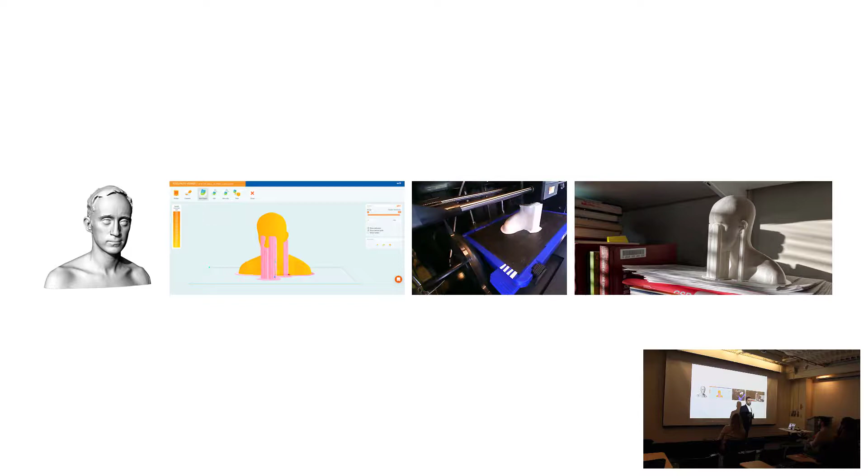This transmission between platforms prevents experimentation, prevents iteration, prevents fluidity in this creative process, right? And if something goes wrong, you have to go all the way to the beginning and start over again, right? This process is very unidirectional, and it doesn't allow for a back and forth between the creator and its tools, which comes from a very long tradition of craftsmanship, where the wholeness of the creator, the tool, and the material is an integral part of this creative process.

And many authors have argued that that craftsmanship is a little lost. And it's lost because of the bias of how these machines force us to use them and to make things with them, all right? So there's all this new wave of interactive fabrication where there is a claim about whether we can close back the loop and make these machines accept back and forth, right? And a lot of work has gone in that direction as well.

The problem with this is that the tools that enabled this were very specific, very customized to these particular projects, and were created by people with very high skills. In order to do this, you have to hack a lot of things, and only people who really know what they're doing can do that. It's not accessible, it's not open to wider audiences, all right?

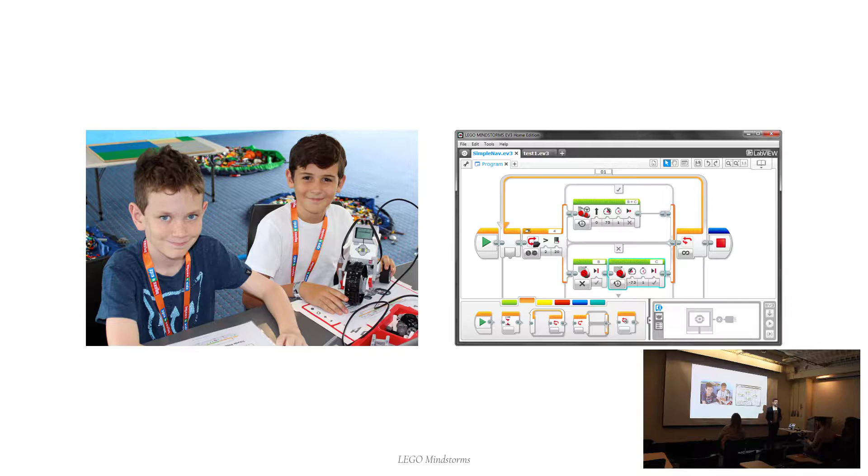I don't know if it's children. I don't know, but I think there has to be an alternative way to approaching robots that doesn't come from symbolic training, but comes from somewhere else, from interactivity, from practice, from action. We're going to get to that very soon, all right? And why do I think that? Because I think that if robots are moving from highly industrialized environments to research labs, to creative audiences, there have to be different tools that address each one of these particular fields, all right? That's my take here.

No questions, okay. So, yeah, thank you.

So this is what I see as the problem space, okay? And my contribution to this problem space comes from a long and wide wealth of studies in cognitive science throughout the 20th century, all right? This situation that I'm describing was very similar in the 70s with computers. People didn't know how to use them. It was very tedious. It was only accessible to a very, very elite. But now they're everywhere, right? And I think that that process is happening with robots as well.

There were a lot of people in the 70s and the 20th century who studied the cognitive aspect of how we learn about using and interacting with machines, all right? And my three main pillars in this dissertation have been Jean Piaget, who founded the theory of constructivism, a theory that says that we learn things by creating models about what we want to learn and then comparing those models with reality, all right?

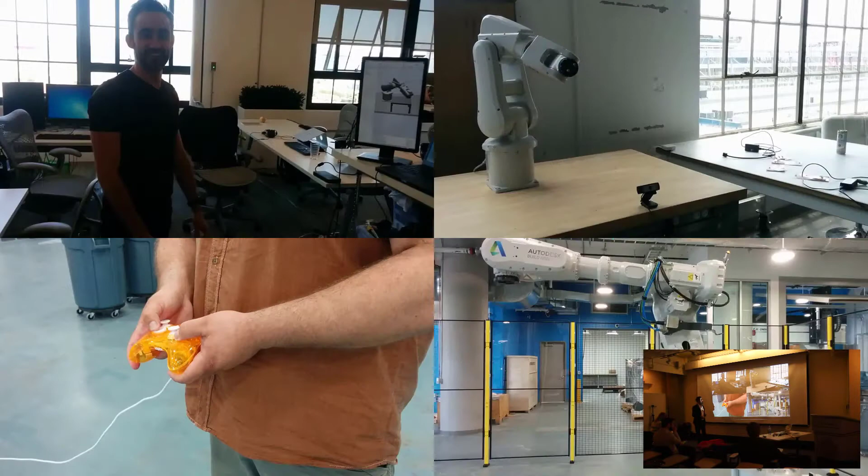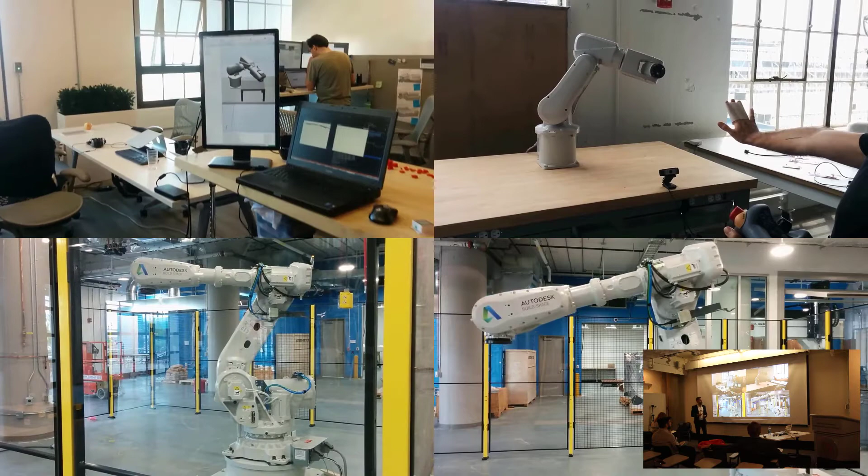So early tests of this framework proved successful. You could do interactive real-time control of machines, and it was actually a lot of fun. But these early tests also proved that C# programming is a very niche thing. It's only accessible to a very tiny group of super users, and building Windows apps is not something that everybody can do. So there was a need to make this available to a wider audience, this creative audience that I'm trying to address in this dissertation.

So obviously, what those people usually use is visual programming languages. So very immediately, we ported all this logic to Grasshopper as a Grasshopper plugin, and we also ported it as a Dynamo package. So you can access the exact same functionality, but from a visual programming environment.

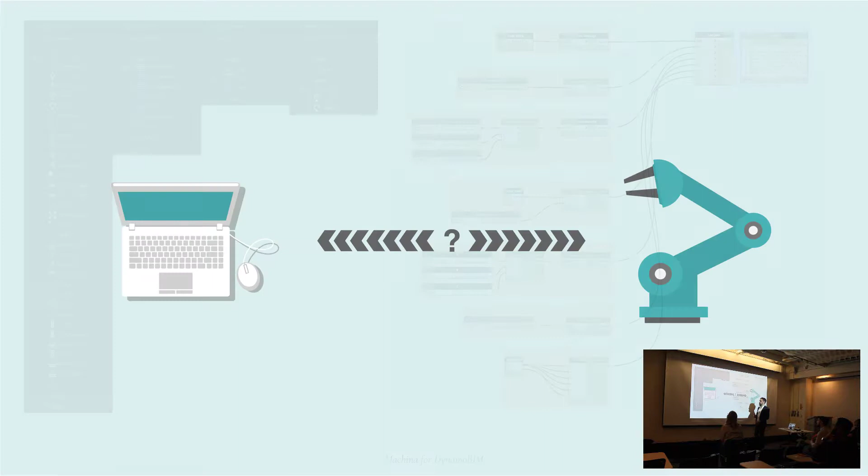The problem with this was very simple. Visual programming languages start somewhere, they produce data, and they stop. The real-time aspect is really hard to implement natively in Grasshopper or Dynamo, because of the way they work. So we can impose actions, but getting data back is really hard. And if we stop there, then we would be perpetuating this model that I want to break free from.

So while this was happening, my friend Nono and I were preparing for this workshop with robots and machine learning, but we really didn't know who was going to participate. We didn't know their skills, which languages they use, or what tools to provide for them. So what should we do? Should we rewrite Machina for Python and JavaScript and all these languages? That would be super tedious and take forever. We didn't really know how to address the uncertainty of a group of users we didn't know, which is actually a very legit question for doctoral research as well.

So we had a sort of aha moment. What if we could isolate in a self-contained environment all the part that was technically complex to implement: the state representation, the back and forth, low-level communication with the machine? What if we pack that in one single environment, and then provide access from any programming language, any platform, any environment, to any decision-making agent? And we make the back and forth communication very simple with a standard protocol, which we chose to be WebSocket. WebSocket is super easy to implement and available in most programming languages. So that led to what I'm calling the Machina bridge.

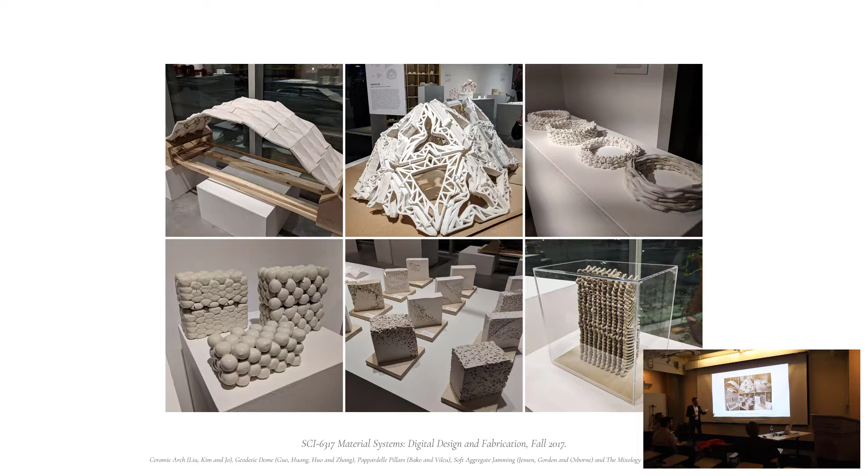And a lot of this work started with a class that my advisor, Professor Bechthold, and I started in the fall of 2017. It was a digital fabrication class in which many students ended up using robots and ceramics for projects that try to engage and innovate in how we understand digital fabrication and clay. But at that time, the framework was still not very developed, so many of these students had to resort to the classic offline paradigm, all right?

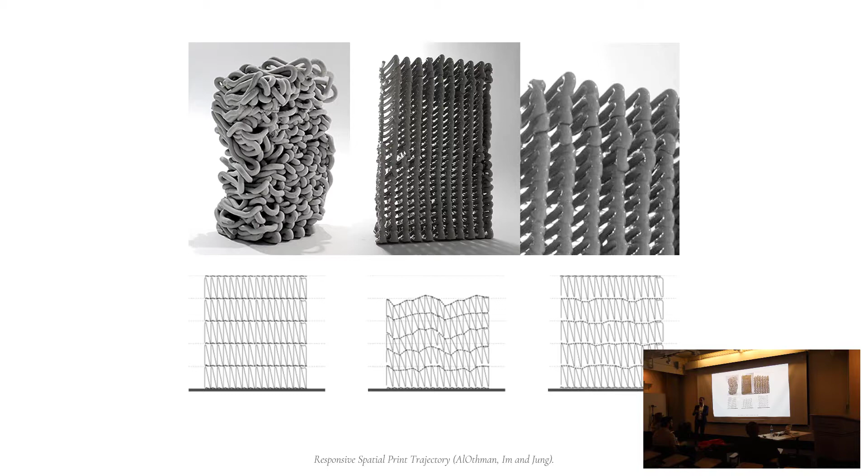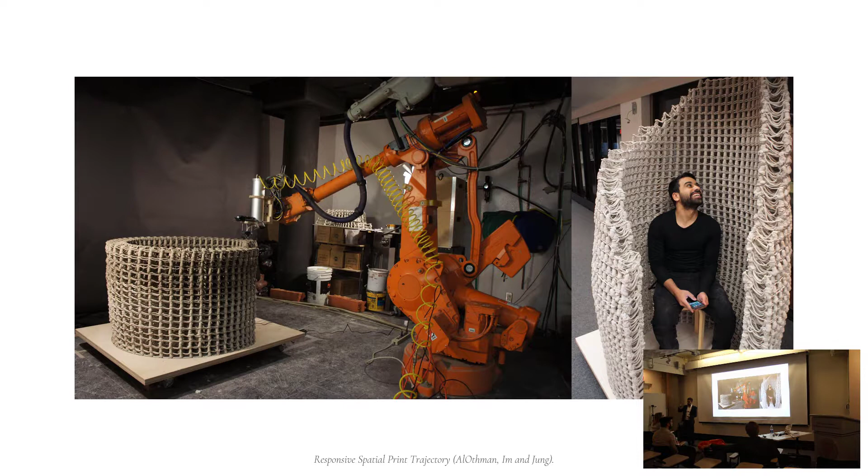With one exception. There was a group of students, Sulaiman, Francisco, and Hyunji, who created this 3D printing lattice system that relied on a self-calibration cycle to recalibrate for the deflection and the changes that happen in fresh clay as you deposit it. So they were able to push this project further and implement a closed feedback loop system where they could 3D print a layer, measure that layer with a 3D scanner, and then incorporate the deflection of those layers back into the system. And then they ended up creating this last Christmas this massive 3D print. It's like this big, it's on the 3rd floor. You should really check it out, it's really cool.

We're gonna put some pots on it, right, Janissa? You're on it, right?

But that was possible because the whole system allowed them to get information back from the robot, which was fed back into the Arduino board, and which was taken by the algorithm that was driving the whole 3D printing process, all right?

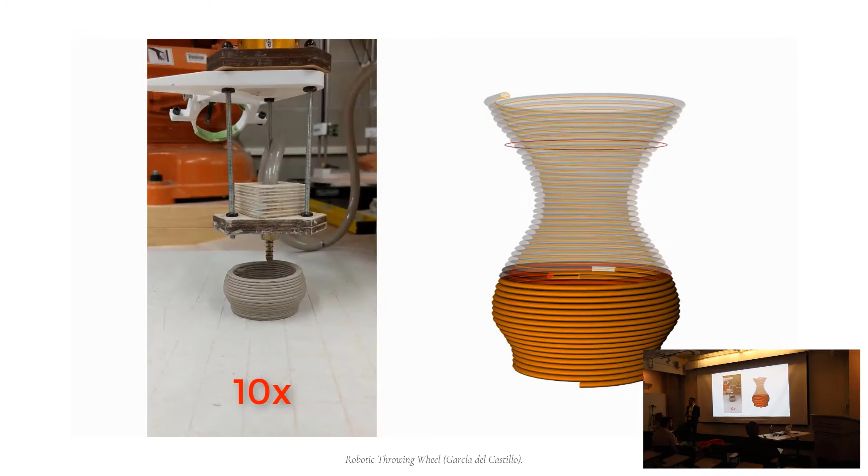Similarly, what if we could 3D print in real time? What if while the 3D print was going on, we had a digital interface that allowed us to change the shape of that 3D print, but also, because the system knows what's going on with the 3D print, it will constrain the freedom that we have so that we didn't create things that fell off or broke, et cetera, right?

So this was a prototype that I created last year, where I have an interface where I can model while the thing is printing. I get feedback from the digital interface. I get feedback from the physical print. And I was able to create this real-time modeling environment, like a modern version of a throwing wheel, all right? And again, that was possible because there was a full closed feedback loop between me, the script that I was using to model, and the whole Enactive system.

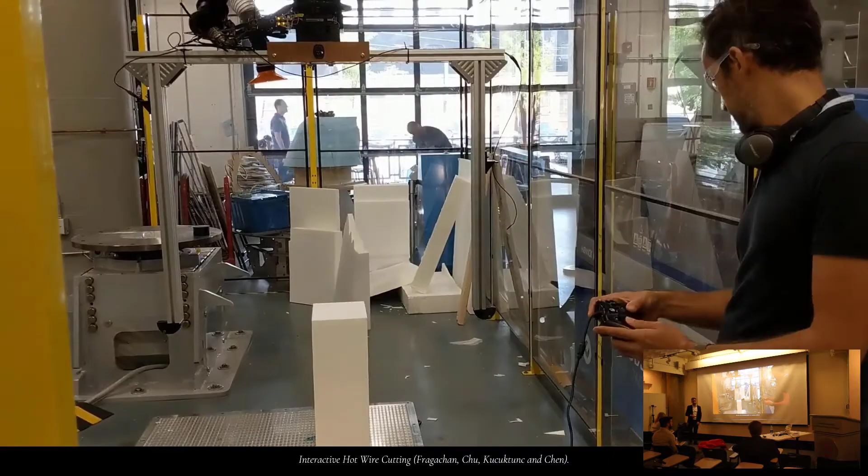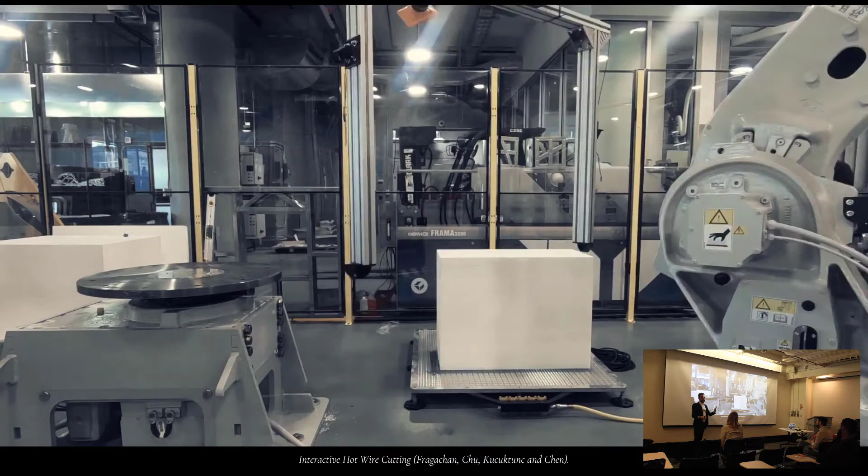I did some work with some students at the Build Space this summer, where they were using robotic hot wire cutting, all right? We connected it to an Xbox controller, and we were able to drive the foam cutting with the Xbox controller, which eventually led to the project that they did, where they used this foam cutting system to create this very large inhabitable pod.

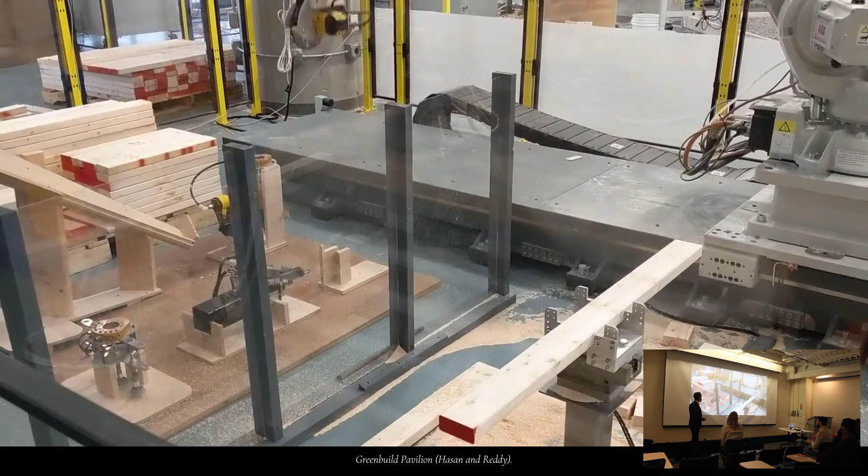Also, Hakim Hasan from the Build Space, who's also here today, he's one of the earliest adopters of this whole system and one of the most patient ones as well. He very recently created this pavilion for the Greenbuild conference in Chicago, which was going on in November.

And he used Machina to create a full rig where 2x4s were picked up from a pile. They were put on this jig, then there was a saw that was chopping them to measure. It was put on the final thing, and then there was a nail gun that would assemble everything together modularly, right?

Even though this project was implemented with a full offline system, it showcases the capacity of the framework to be not only experimental and novel, but also to be a robust, resilient production tool for very fast, very powerful robotics, right?

And it's also really badass, right? Like saws and nail guns. It's like America in a nutshell, huh? If only there was a flamethrower somewhere, huh?

Yeah, it ended up in this prototype that was built with robots in the marketing material, right?

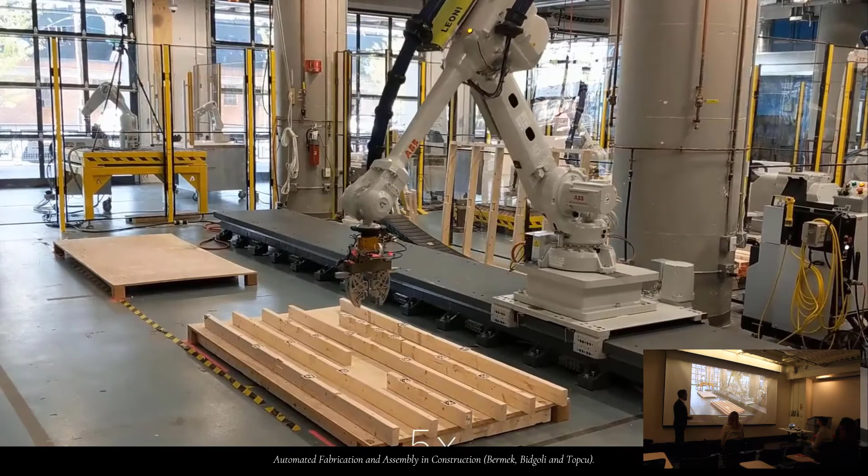But building on top of this idea, some other colleagues of mine at the Build Space, Ardavan, Mehmet, and Sepki, were trying to address a similar issue, but in this case, the issue of uncertainty on a construction site. So they were able to implement computer vision to figure out where certain elements in an uncalibrated environment were, pick them up, put them on the jig, and then assemble them to measure, all right? By closing the system with camera, computer system, and feeding that back into the main algorithm.

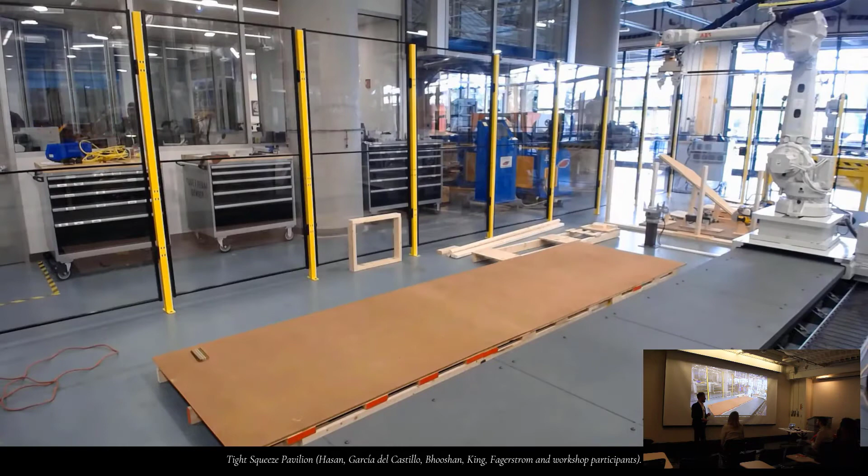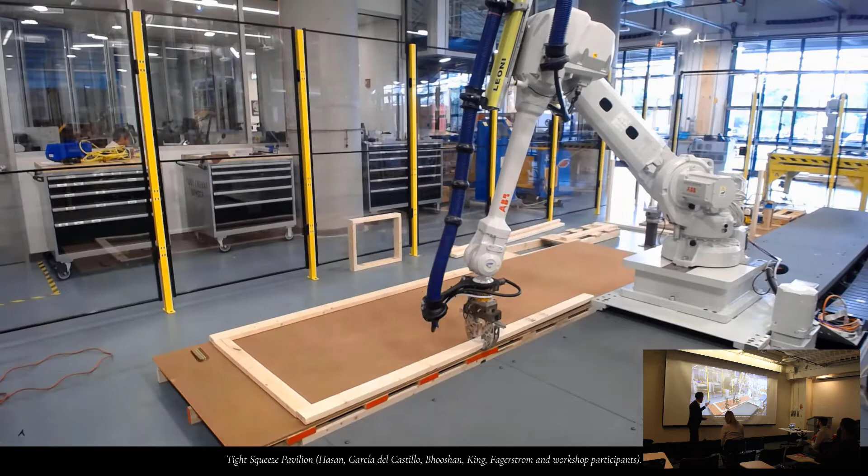I know. But what if instead of algorithms, things were driven by humans, systematically on the loop, right? So in this prototype, my colleagues and I were trying to figure out how we would create a large-scale construction. Very simple, just 2x4s, balloon frame, but on top of a baseline construction system where the robot is using power and precision, there was the possibility for humans to intervene in that process and make small tweaks. Whether that was to counteract calibration issues, or to apply design decisions, to make decisions on the fly, right?

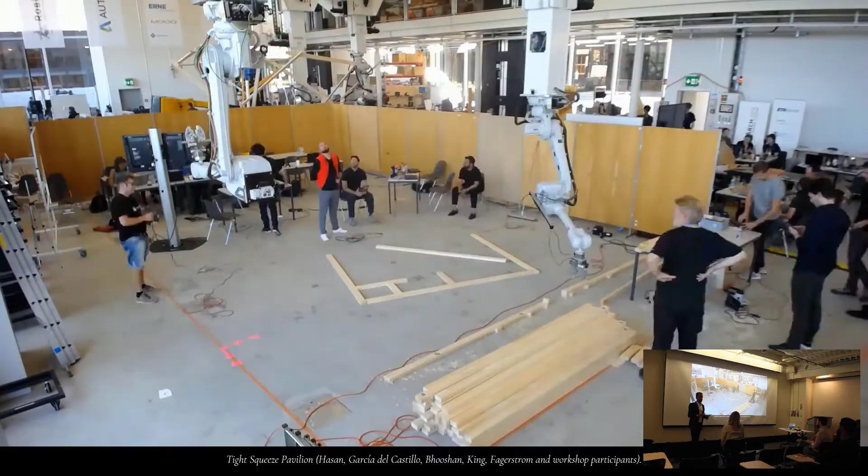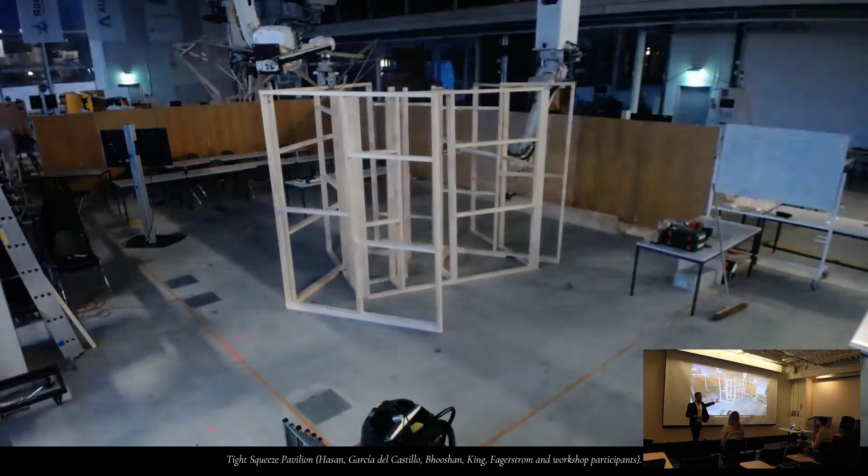So this idea of integrating robots and humans collaboratively on the construction site all of a sudden became much more relevant and possible because the system is open to real-time intervention by humans. So here we were able at the ETH Zurich to build this small pavilion with our workshop participants. It was a Zaha design. I believe it's the first Zaha design that has been fully built by robots, all right?

With this system that was a hybrid between robots doing all the precision work and humans making small tweaks, all right? Provided by the possibility that the system could drive the two robots, and then there was a lot of feedback between users, scripts, et cetera.

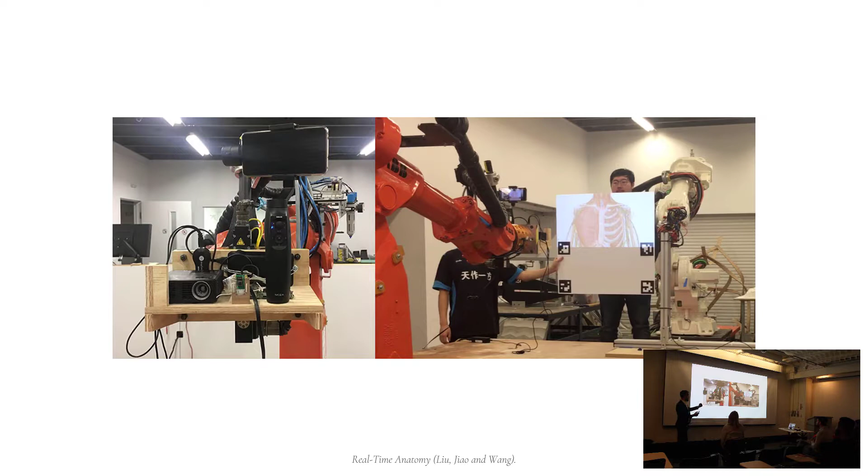Carnegie Mellon students were able to create this interactive installation to move this board around and have the robot project an overlay of anatomical images on top.

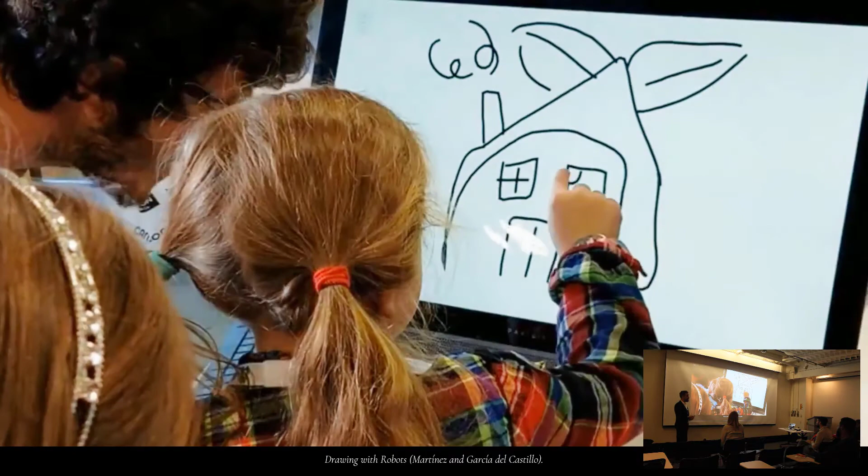Not everything is building or making things, but there are softer ways of doing that. We were able to create, for example, installations for Kids Day at Autodesk, where we had this screen where kids could draw, and then drawings would be sent to the machine and printed. We were able to do that on a closed feedback system. But we could add more to that.

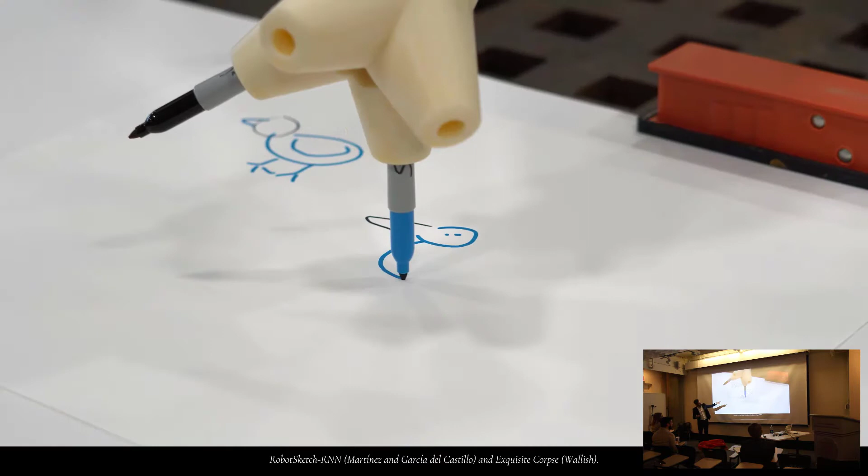So in this example, we incorporated a neural network, SketchRNN, that was published recently by Google. What the system does is you give it an initial input like this, and then the neural network fills in the rest of the sketch. What you're seeing here in black is what the user input, and what you're seeing in blue is what the machine learning framework is providing. So it's this sort of collaborative drawing between humans, robots, and machine learning, right?

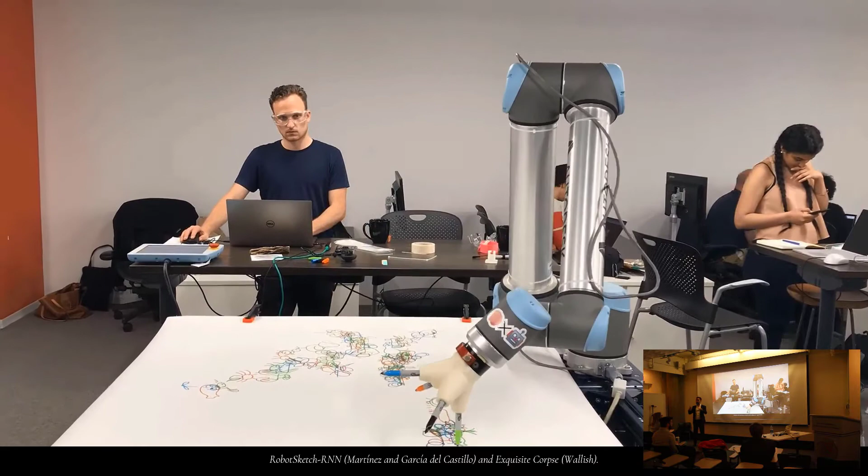Which was further extended by a colleague of ours, Sean, who thought, well, what if we created an art installation where we use this system, but instead of giving it input constantly, we used the last stroke of the last sketch as the first stroke of the next sketch, creating this recursive drawing machine with the same architecture.

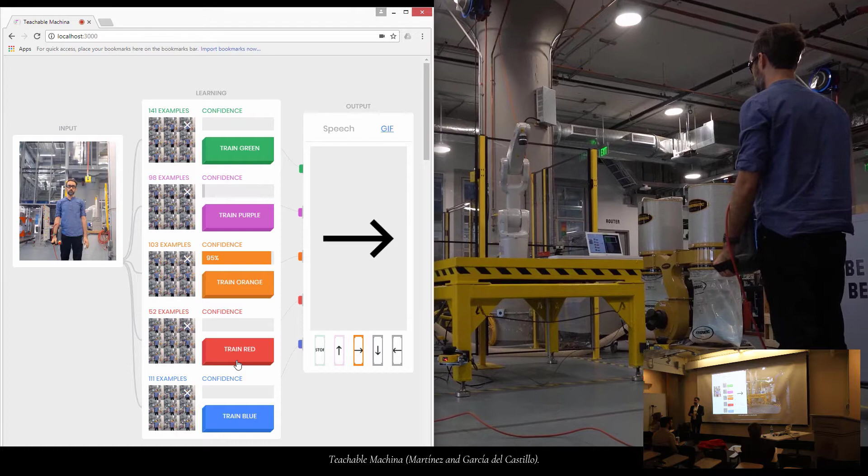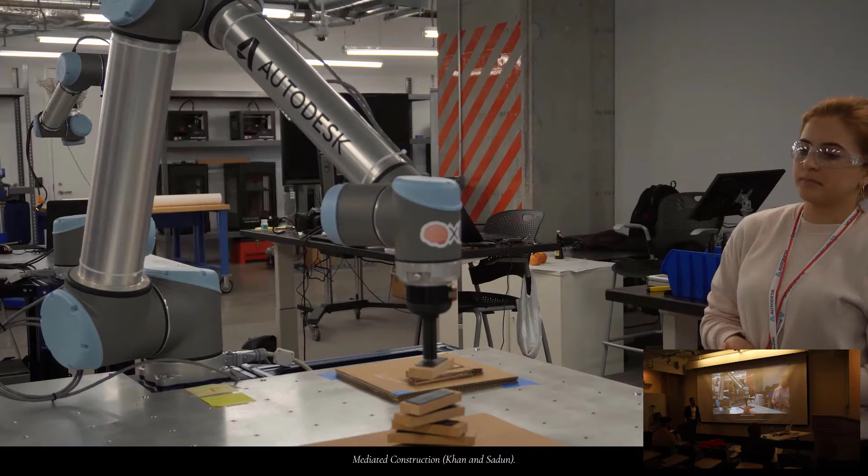Similarly, we used here another machine learning framework to train a model on site. You could train it in 5 minutes to recognize certain gestures and to be able to drive the robot with these gestures, which some of our workshop participants turned into this system that could accept human guidance to build things in real time.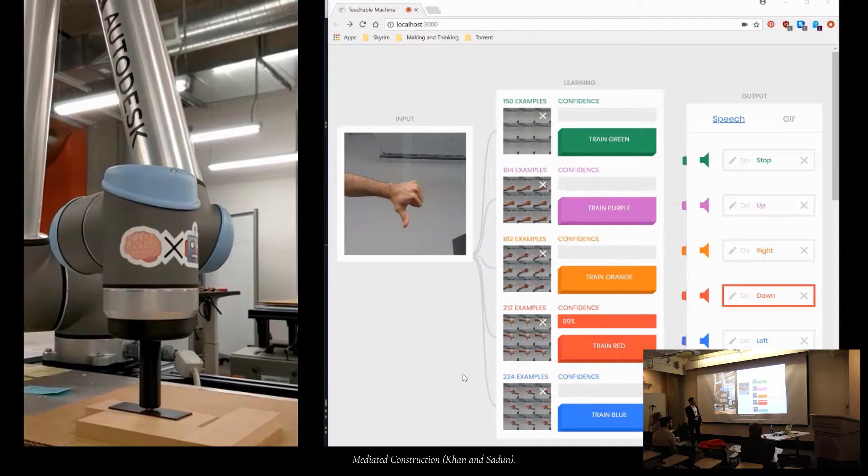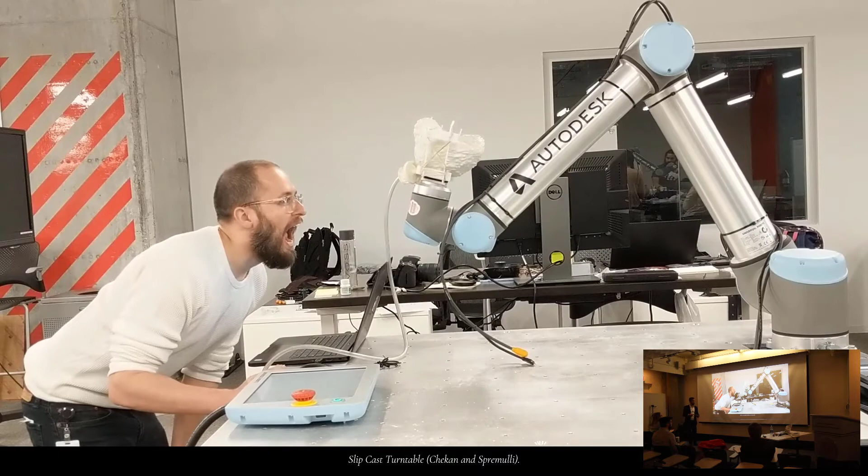Or this other system where the participants used the system to automate the tedious process of moving slip on a mold, but also customizing some of the orientation of that mold.

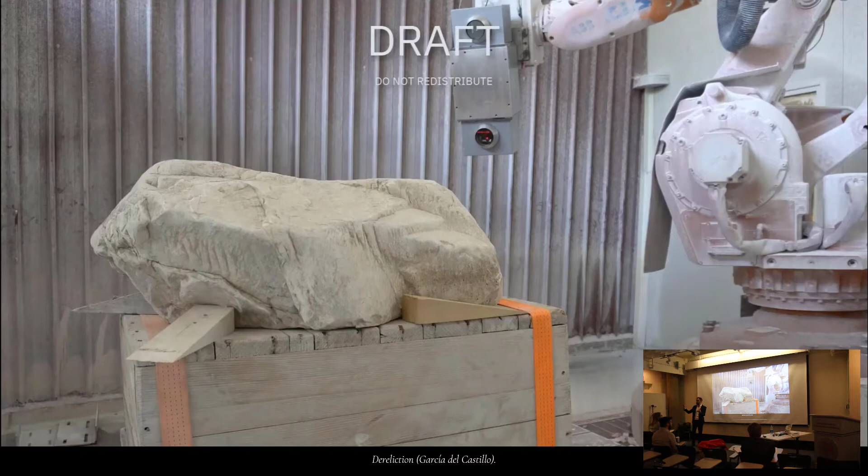And lastly, I would like to present this project that I did last summer. It was a speculation on sculpture and art. What we did was we grabbed this boulder, a really beautiful marble boulder that was abandoned on the river. We used the robot to 3D scan it, and then we used some genetic algorithms to propagate a maze pattern on top of it.

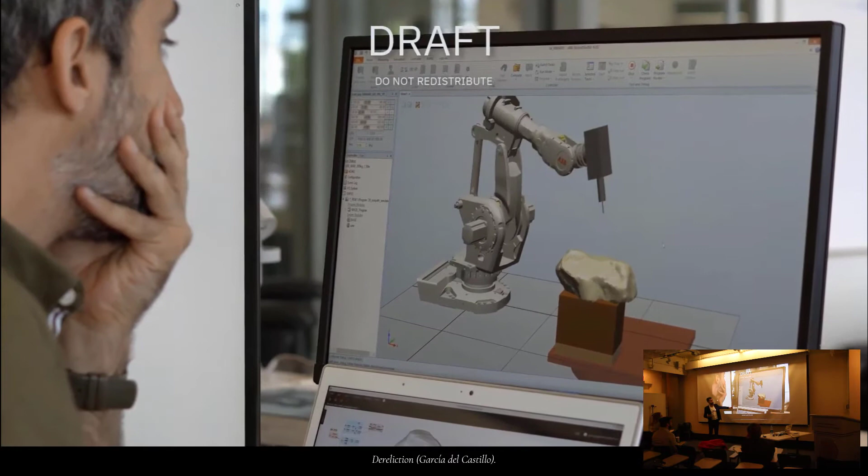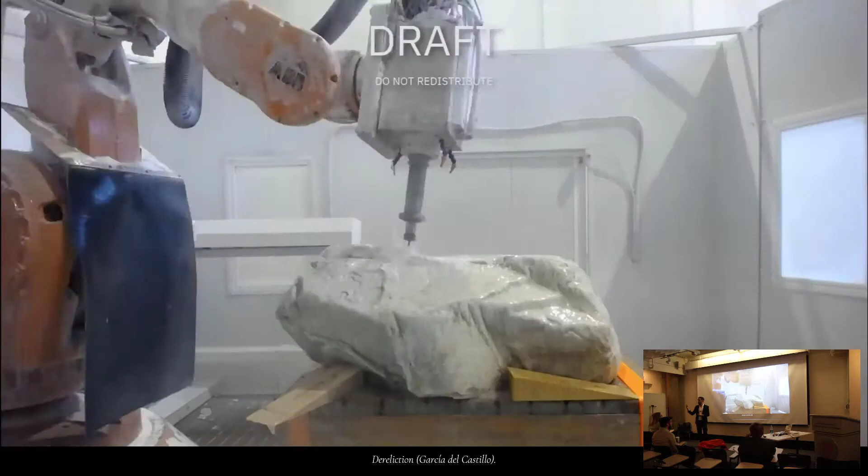But what's interesting about this project is that even though the final milling process was offline, I used the real-time capacity of the system to use a simulation environment, and to simulate everything beforehand in real time and figure out the areas the robot was not going to be able to reach, what was out of bounds, and then heuristically clean that up from the previous model. So I used real time for simulation instead of for the final object, which is what I represent here.

I'm going to wrap it up here. I use these case studies to showcase that beyond the offline model, there's another world that is possible, where this richness of interaction between elements, modules, and this modular approach to creating programs is possible because systematically, the technical core that is a problem is already figured out. And then interfacing with it externally all of a sudden becomes really easy.

Also, these projects represent 3 things that I'm interested in. These projects were implemented by a whole variety of people with a whole variety of different skills, from complete novices to super users. These projects were driven by very different agents, from humans to machine learning to deterministic algorithms.

And these projects were implemented in very different varieties of concurrency, right? From the very real-time back and forth data exchange, to a more paused, turn-based approach: I send a lot of stuff, I get information back, I make decisions, and then I send a lot of batch, to the very offline paradigm, which is a very slow form of real time. You send everything, and then you just never listen to anything back.

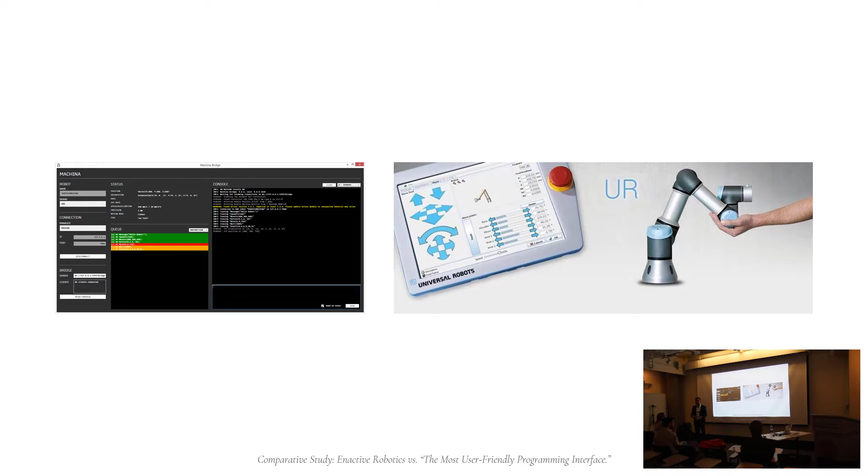I'm going to conclude this presentation with the user study that we did to prove the other assertion that I made in this dissertation, which is that approaching robots in this way is much easier to learn than with other systems. But what could we compare this to? We chose Universal Robots, which are branded as one of the most user-friendly robots on the market right now. They're very popular. And we set out to compare how users learned and did robotics with Machina versus Universal Robots.

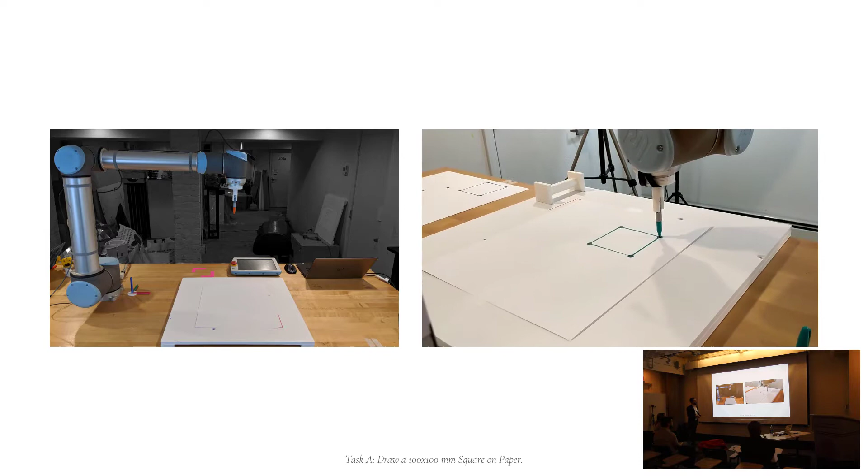Participants in the study were taught how to use robots with a set of standard training from Universal Robots. It's the UR Academy, you can go online. And then I created a set of tutorials to use Machina, similar in content, scope, and duration for a fair comparison. After users were trained in Universal Robots and in Machina, for each system they were asked to implement 2 basic tasks.

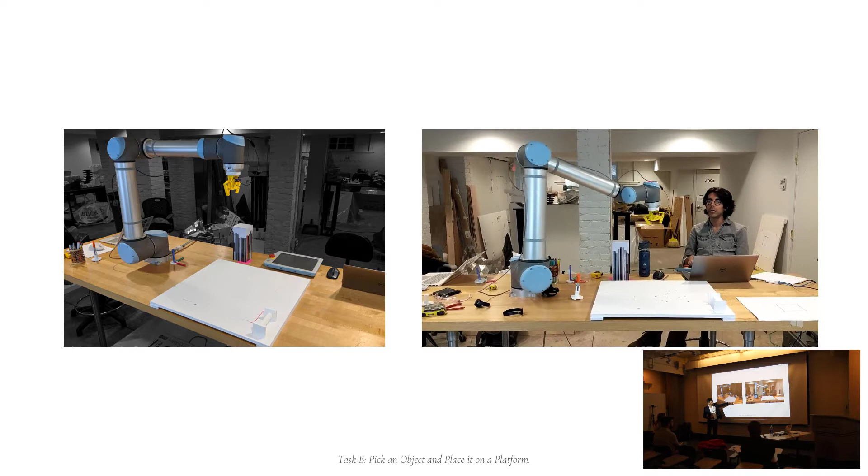One was just drawing a square on a paper with a marker, and the other one was to pick up this object here with these grippers that were on the robot and place it on top of this platform here, all right? Two very simple, very standard operations that you can find very commonly, all right?

The study was designed as a crossover study where half the participants started training with Universal Robots, the other half did Machina, and then there were surveys all over, and after they finished, the group went to the other system. That was designed that way so that the analysis of the data could be done on the first half, where there's no bias, people have not been exposed to anything else, but also so that at the end, they can compare the two systems between them, all right?

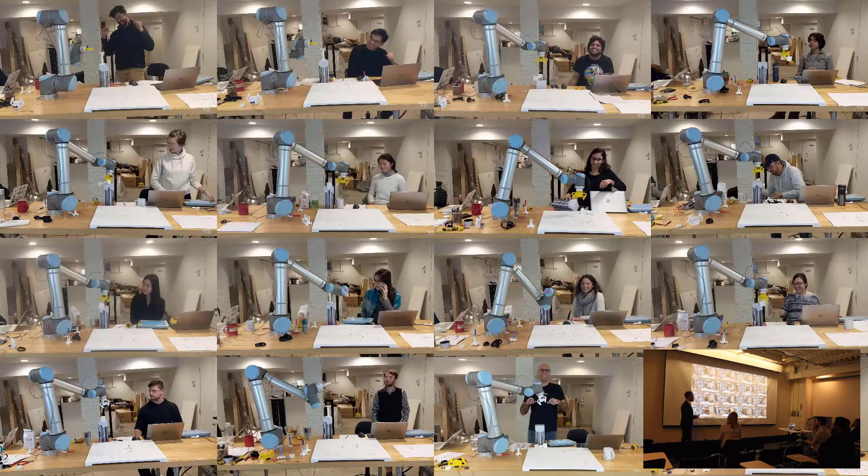And it was such an interesting experience. So interesting. I had never done real user studies. I recommend it. It's tedious, it takes forever, but it's really interesting.

For the demographics, we had 20 participants. The demographics are something that I can show here. Most of them had 3D printed stuff before. Only 3 of them have used robots. It was interesting to have some people that were not purely novice, but had some exposure to robots before. They were fairly acquainted with the typical design tools that we use, and some of them were good with coding, but mostly it was not the main platform.

And the results were very favorable. So altogether, people found in general Machina easier to use, easier to learn. It provided a more fluid experience, and all these sorts of things. I recommend you look at the data in the dissertation. There's a lot of numbers, but basically, it was interesting that at first they all liked both systems the same, but once they tried the other system, people liked Machina much better than the other one, after comparison, all right?

Interestingly, they found Machina much easier to use in general than Polyscope. Participants were way more engaged during the training than they were during Polyscope because they had a tool that allowed them to type things and do things while they were learning, instead of having to go back and forth from the training. They found that testing things on the physical robot while learning was way, way better for understanding the system.

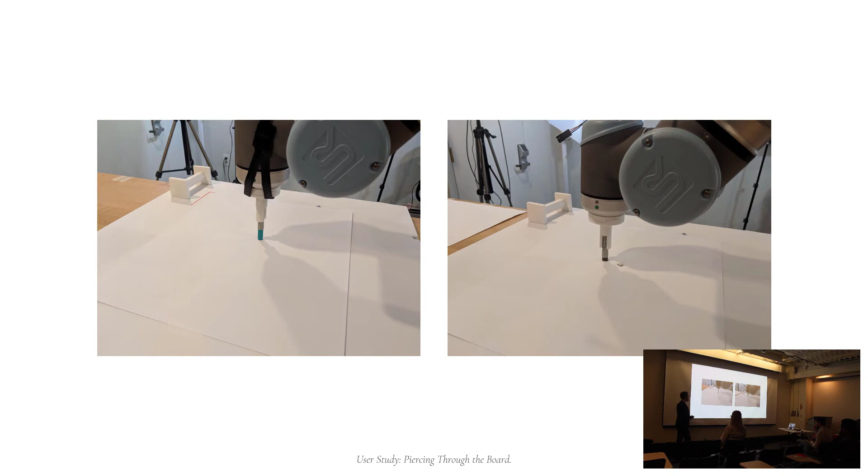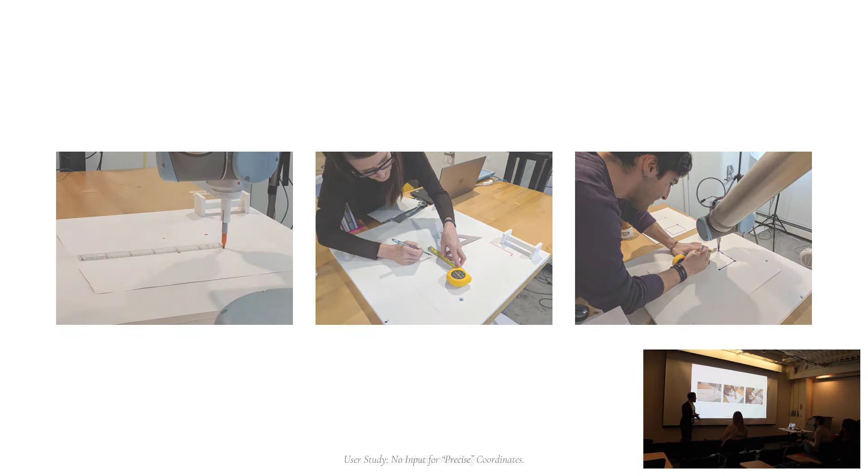And yeah, I'm going to conclude here. So I presented today Enactive Robotics, this model for concurrent machine control. I defended that it's easier to learn, that it provides a deeper set of possibilities. I presented the conceptual model, some technical implementations to back it, and I presented case studies and a user study to back those claims, all right?

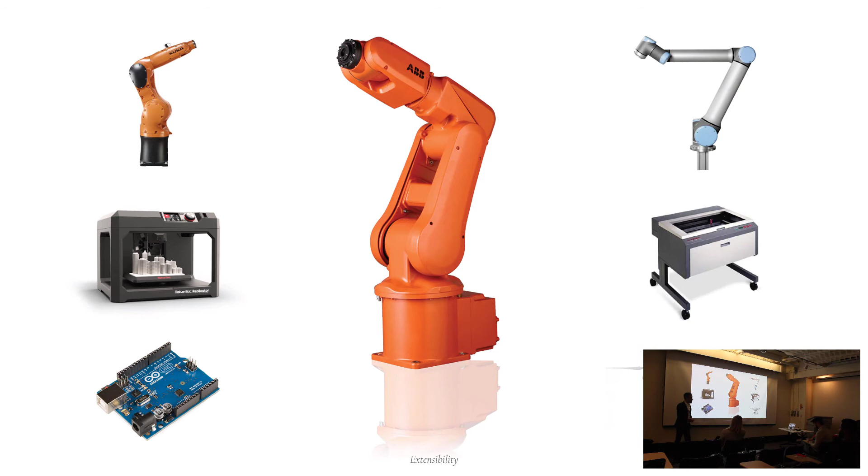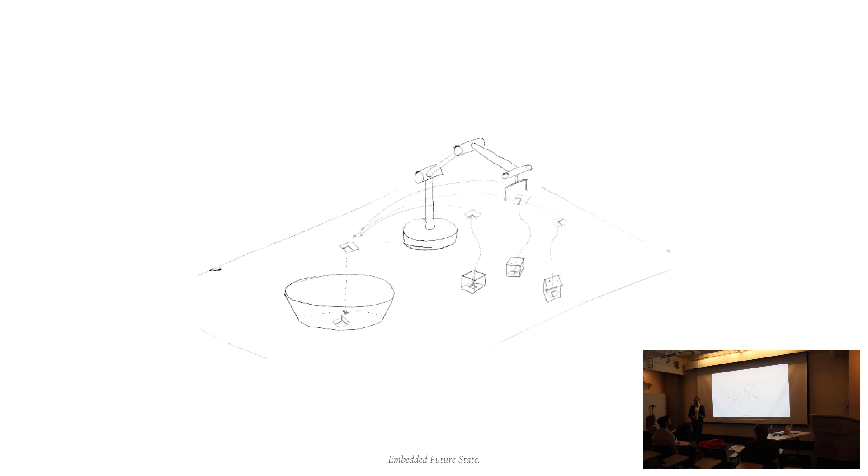There is a lot of work to be done yet. We have to prove how this model can be extended to more than just industrial robotic arms. There is the question of increased feedback. There is the question of providing feedback about the future of the actions before they actually happen. And there's also the question of safety, because industrial robotic arms are dangerous. So pre-embedding enhanced safety in the system is definitely something that should be worked upon.

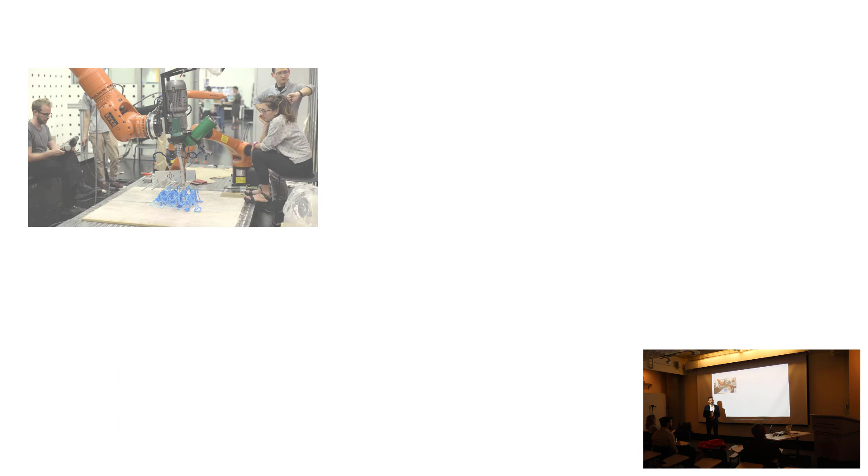And I would like to conclude that I believe all of this work from the very beginning, no matter how much I've talked about the robots and machines, at the end of the day has always been about humans and about people. I believe that in a future where the conversation is so dominated by how machine learning and robots are going to take over all of our jobs and render all of us useless, bringing machines closer to people and providing better access to them is critical to bring these two worlds together in a world where we're going to need these machines, and we're going to have to live together. So going towards human-robot collaboration, I think, is part of this endeavor.

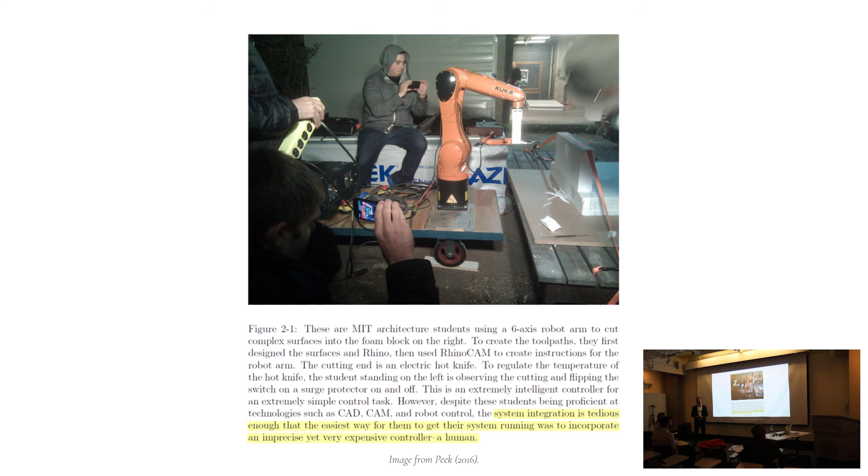And I look forward to a future where this example that I showed before, the one describing Peck, is not a story of failure, but instead a story of success. A story of success because the tools that we use to drive and program robots situate humans at the very center of those systems, and therefore human-robot collaboration is not a fancy fad word in conferences, but a practical fact nowadays. And that's it.